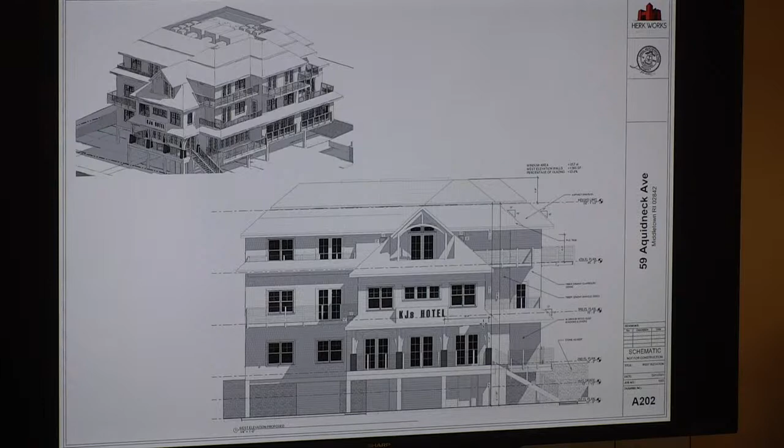As you can see from the elevations, let's deal with A202. That shows the front elevation of the building, facing Aquidneck Avenue. You're going to have parking beneath the building. There is going to be a main entrance to the building from the parking lot on the south side of the structure, as you can see there. There's going to be interior stairways from the below deck parking, and an elevator at the ground level in the parking to get to the second, third, and fourth floor of the building. But the primary entrance from the exterior is going to be off the front side of the building on the south side.

If you want to look at A200, that's going to be the interior of the site. Starting from left, going to the right, that's the second floor plan, which shows the restaurant area, the kitchen for the proposed restaurant, and then a catering space to the rear of the second floor. The third floor plan contains several rooms, and then same for the fourth floor, additional rooms. So we're going to have a total of 17 rooms in the structure. So that's the second, third, and fourth, is that missing?

You want to look at the first page of A200 and look at that rendering in the upper right-hand corner. What the architect, Mr. Herkimer, designed was a kind of false roof to shield the mechanicals from the street. The mechanicals sit on the flat roof, which is 45 feet in height, and he prepared a false roof to shield those mechanicals from street view.

Mr. Costa had an issue with that false roof, which resulted in the second design, the B200 series. His issue was that he considers that part of the building height, even though there's no livable or habitable space above it. We're treating it as architectural screening for the mechanicals, not habitable space, and I think that's been used in other locations where you have a false roof so mechanicals aren't visible from street level. Because of Mr. Costa's concern, we presented a second set of plans, the B200 series.

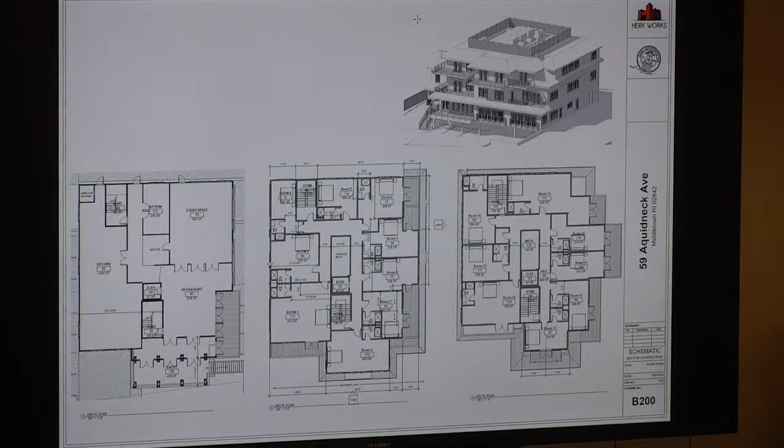Ron, is there a definition of what constitutes the roof? That's up to the building and zoning official. There is an exception for building height which excludes cupolas, flagpoles, chimneys, and 'the like.' My understanding is that 'the like' has always included screening around mechanicals, air conditioning, and heating placed on the roof. So it's our position that the screening and lattice is exempt from the building height. It doesn't look as nice as the false roof line, but we'll leave that up to the board as to what you'd prefer and what recommendation you'd like to give.

Paul? Go ahead, Bill. Peter? Can you help us here with this?

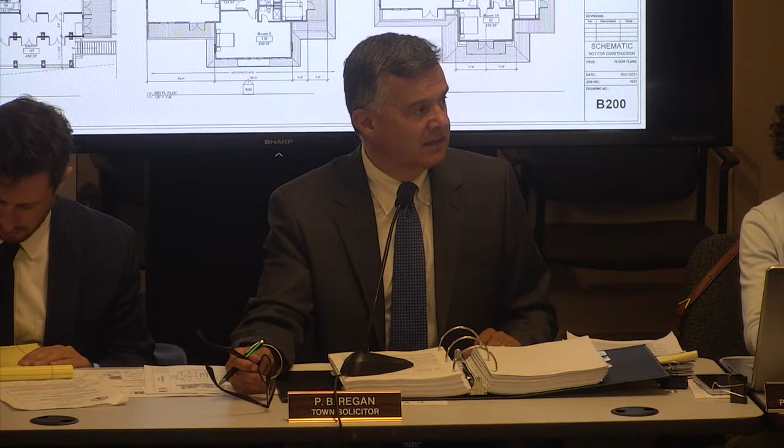Well, what I need to do is meet with Mr. Costa, because I haven't had a chance to speak with him on this, and I don't know the specifics of his determination. So rather than speak in the abstract, since ultimately it's the building official's call, I'd like the opportunity to meet with him first. Right, no, I concur. Yeah.

The definition of building height doesn't specifically reference screening for mechanicals, it just uses terms like cupolas, spires, chimneys, and the like. I'm familiar with that. I do need to speak with him, and I can get back to the board. I agree with that. I've got to tell you, for me that's the crux of where we're at right now. That's an important determination for me.

Art? Well, I think there's additional zoning interpretation needed also, according to what I read in the planner's memo about the buffer between the parking lot and the residential areas. I don't think that's been worked out, because I don't see anything going either way. It says that's being worked out between the applicant and the zoning officer. So we've got a little problem with height, and we've also got a buffer issue, among many other things, between the parking lot and where people live.

And that's important, and that's one of the issues we're prepared to address. My understanding is that the property directly to the north is being rented out as a B&B, a short-term rental. It's not being used as a single-family or two-family residential structure, so I think it's a commercial use. Then there's a question of whether that buffer would apply to the commercial use, because it is zoned limited business on the site to the north as well.

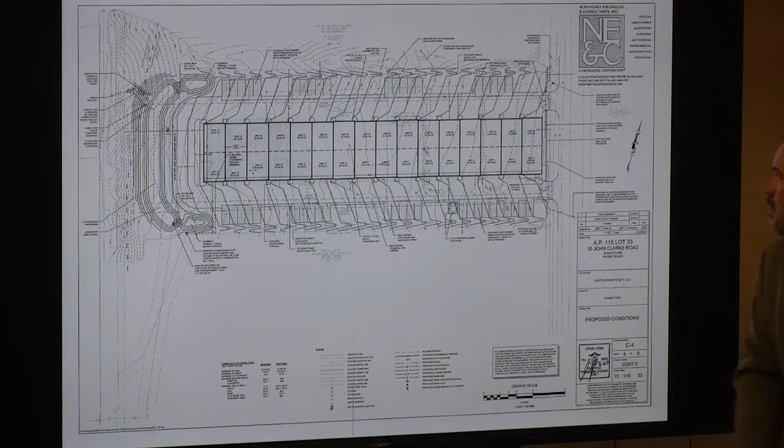We also have a dumpster located for the project site. Where's the dumpster? The dumpster is on the southern side, on the downhill edge of the first cluster of parking. So can you back up, though? You mentioned there's no office. There's no office because there's no office needed for this type of use. But it's shown on the plan. Oh, I'm sorry. Yeah, let's clarify that, that would be helpful as well.

Well, Unit 1, when the plans were developed, I think there was some question about whether there was going to be any type of staff that would need an office. I believe the direction, so it was reflected as Unit 1/office. I believe the direction this is going is it will be condoed, it will be regulated in that way. Each unit owner will have his own ownership status. There won't be a separate office there managing things.

Will that be in Unit 1? You can come up and explain that then. I know what you said, but you can say it again. Yeah, that one unit was going to be the showroom as the project developed. And then, of course, once the project is sold out or leased out, it would become a car storage unit.

So if somebody has a problem, how do they get help? Say there's some problem, the door doesn't go down, is there a... There'll be a property management company on call. So there is somebody that can come out and take care of whatever it is? Yeah, this type of facility does require a number of services, like having their cars moved to another location down south during the season. Any number of things. Okay, thank you.

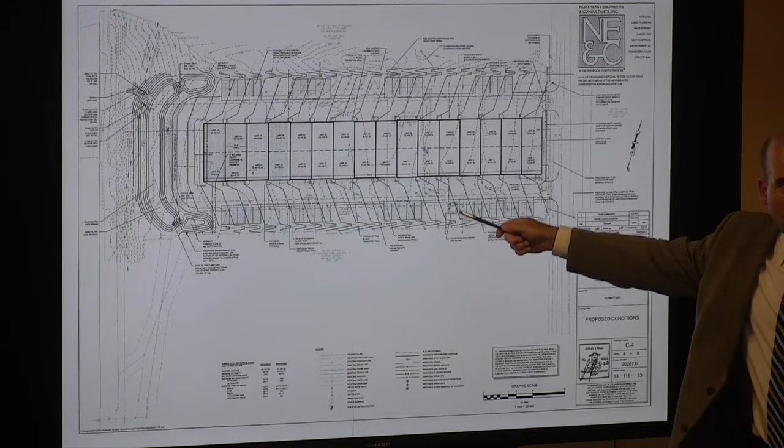Lynn, if you could just confirm, for Mr. Nash, this is where you're talking about - that's the dumpster located for the project. We don't feel there's going to be a huge use for a dumpster on this project, but we have a placeholder for a 6-yard dumpster. This type of dumpster is on wheels, so it can be rolled out when the trash comes to pick it up - they'll pull around, make the loop, roll it out, lift it up, empty it, and roll it back.

Okay, so we're talking about waivers 3 and 4, relative to trash receptacles and designs, and I'd like to know if you still want those waivers or not. We don't believe we need them. Could Ron work with them to come up with an acceptable design and placement and maybe eliminate those waiver requests? If the board's comfortable with that, absolutely. Yeah, why don't you do that?

So I think we're at 5. Similar to the pedestrian crosswalks requirement, there's an ordinance that's a pretty onerous standard for the number of bike racks per parking spaces - might be 1 to 5, so 20 plus bicycle spaces. I think the idea is partially that you're going to have owners buying a storage garage unit - if they were to ride their bike to this facility, they'd have a storage facility in which they could store their bike. If the planning board and the planner feel substantial bike rackage is important here, that's another area where we're willing to work with you, but based on the storage on site, we would like to request the waiver and not be required to have those.

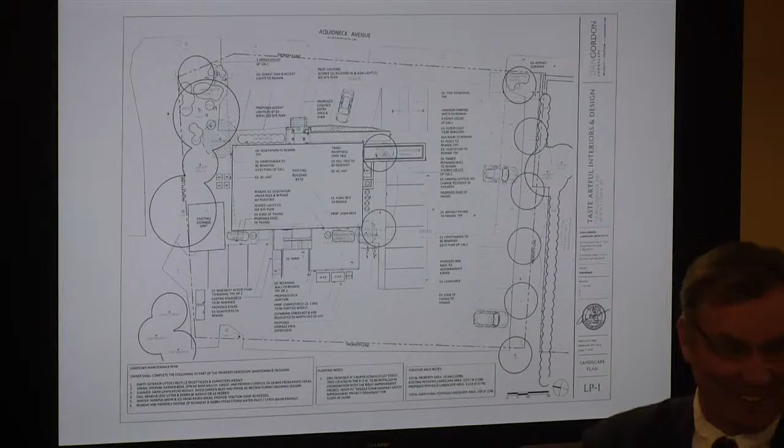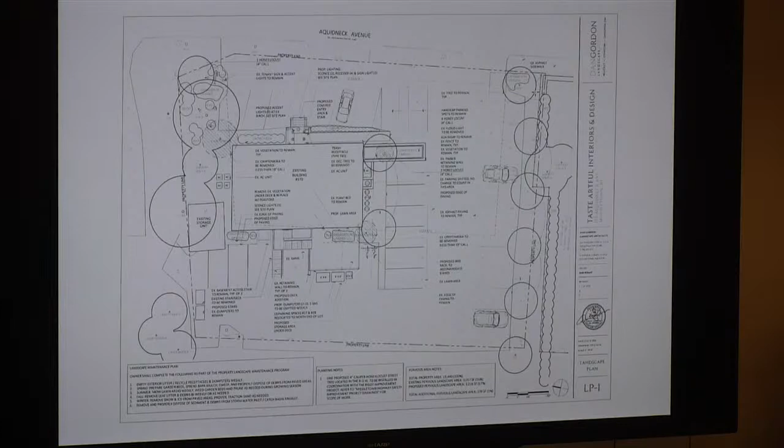So, now he comes up. That's to the south. So while trees couldn't be provided across the front property line, we're proposing to put some across the south property line as an attempt to, while it doesn't technically meet the requirements for every 30 feet along the front, add deciduous trees here to meet the spirit of the regulations.

Other comments? Bill, I do. So I support what you're doing here. I love the change in the building and all of the waivers. We talked on the site visit yesterday about the back of the property, how there's so much potential there with the pond, and you mentioned the vistas, Dave. I think we've done a real nice job, and I'd like to see you consider that.

When we do a full site plan review or a full development plan review, we talked yesterday also about the whole property and what we can affect. One of the things that sticks out to me, and as I was driving away yesterday it hit me, and I see it tonight, but it hasn't come up yet, is the storage units on the north side of the building that are conspicuously identified on some of the plans and not so much on the others. I know that's the Paradise storage bins, but considering everything you're doing with this property, that unit stands out as a sore thumb to me.

I need to ask, is that something that can be removed? I just think it's the only thing left on that property that really should not be there.

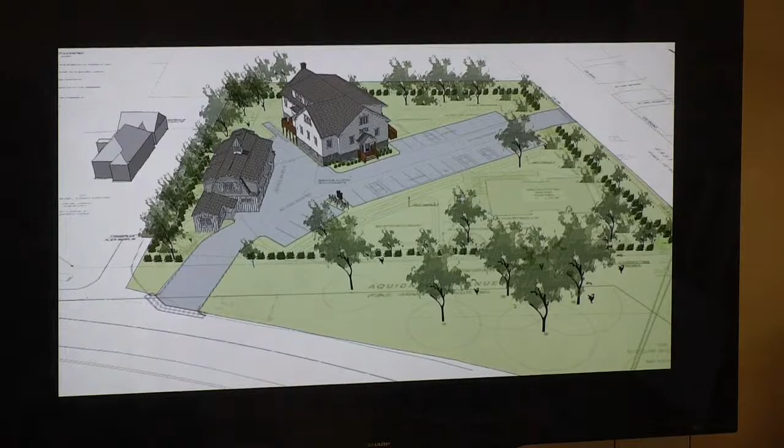I'm familiar with the intention of the town to keep the Grange a historic icon, and a lot of that has to do with the front facade. Some things missed last time were a couple of windows in the front of the Grange that were faked. They're on the drawings, but everyone felt it'd be nice if those were real, so we're bringing those back. The original Grange facade will have the original windows restored, at least on this front elevation that everyone can see.

And then the side elevations, there's a long gable that runs all the way across. To really capture the second floor, maybe we can flip to another Ron image. Go back a few. There you go. So to capture some usable square footage - obviously this building doesn't need to be a big hall anymore as it once was.

It'll have the restaurant portion back where the brand new commercial kitchen is, and the front portion will be the building side. To use that square footage without extending the building vertically, we're putting a low-slung shed dormer that runs the length of the building, and extending the canopy that now protects the top of the stairway on this side, so people coming to eat would have a little private spot to sit outside, not down on the grass area, which will still be available, but a bit more enclosed, keeping the sun off and maybe even usable in a drizzle.

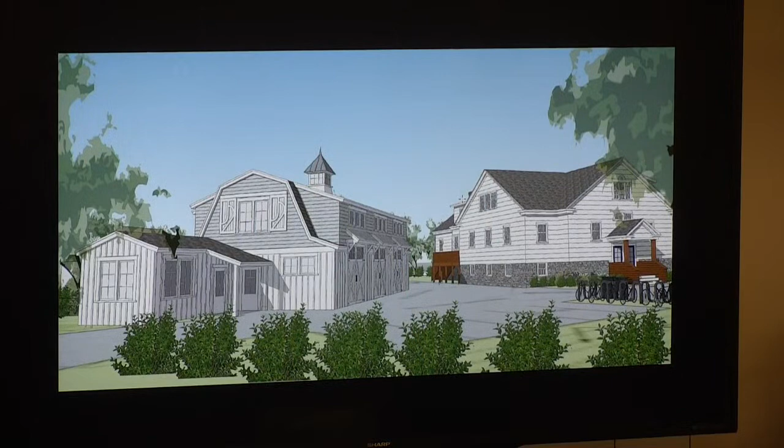Again, that building is designed to be appropriate with the standards of scale and massing for New England-style buildings, trying to keep it low, almost residential scale, building up to the larger unit. Not to take away from or mimic what's going on at the Grange, but to feel like an outbuilding appropriate for that bigger building we're taking over, and still have that agrarian theme. Exactly - so you see a gambrel roof here, sheds and cupolas. All of that is in the idea of what we're looking to do, tipping our hat to what the use was, and even what the Grange was originally used for as a farming homestead.

So on this side of the building, to gain more space, we have a gable addition that attaches to this side, this being less impactful than the other side, which gets more visual attention from the Aquidneck side. So just changing it up a bit to give some square footage for this addition. Behind that will be a little area where the restaurant can take food in as it does today, and also have dumpsters and things sitting behind, screening all of that from the visual of the two main roads in front of it.

And then beyond that will be a shed dormer that continues on, so we can pick up square footage on the second floor for a mezzanine in the restaurant space and office space on the second floor of the Grange building for the construction office. I don't know if I have much more - we can go through various materials, but the idea was to stay right inside the design criteria for planning in Middletown. We looked at those before designing any of this, and also tried to maintain the general shape and scale of that front facade for the Grange itself, which is really where the majority of the historical significance still lies.